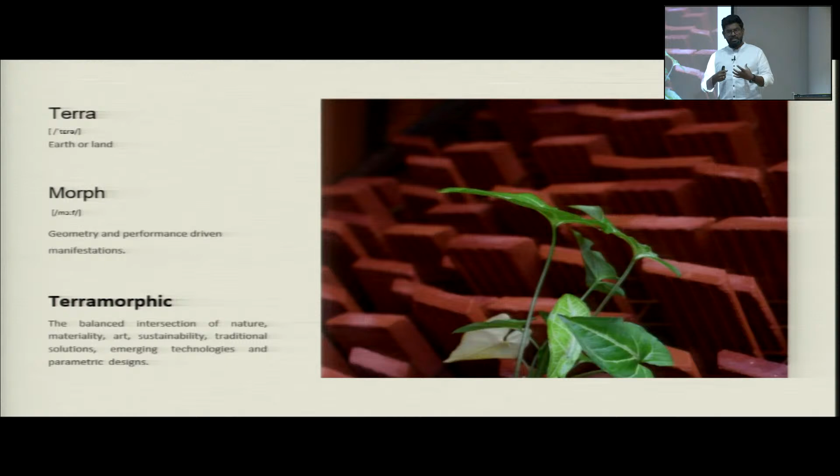So like I said, terramorphic - how we can try to balance, because this medium, ever since I learned from my gurus how to deal with it, when I started off with the practice, it was more about looking at the beauty more than the functionality of the material. I think as a material, it really allows us to play with form - it is so flexible and malleable, we can actually create almost anything.

There is one installation - the ultimate form was not in terracotta, it was done in fiberglass. But I think the first experience of how we played with clay, it's almost like a 10-meter long sculpture, 10 meter by 3 meter by 3 meter is the volume of that sculpture, wherein the entire formwork for the first time we made in clay. I think that's how I actually got introduced to the material.

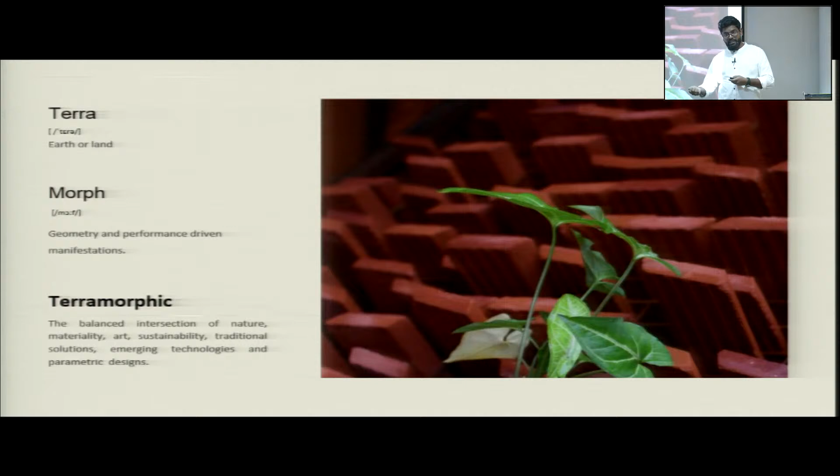So going forward today, I'll be talking about 3 parts. One, material and form explorations, which is purely form oriented, so I will not talk much about it - I'll just skim through some of the expressions and leave it at that, not getting into detail because of time constraints. I'll talk more about the CoolAnt, a product we're working on, and nature-inspired passive cooling solutions and how terracotta is playing a role in that. The last part I'll be talking about is the bioreceptivity of the material, and how it can actually play a role in air purification.

This is a research project that we're working on, which I'll also touch upon very briefly.

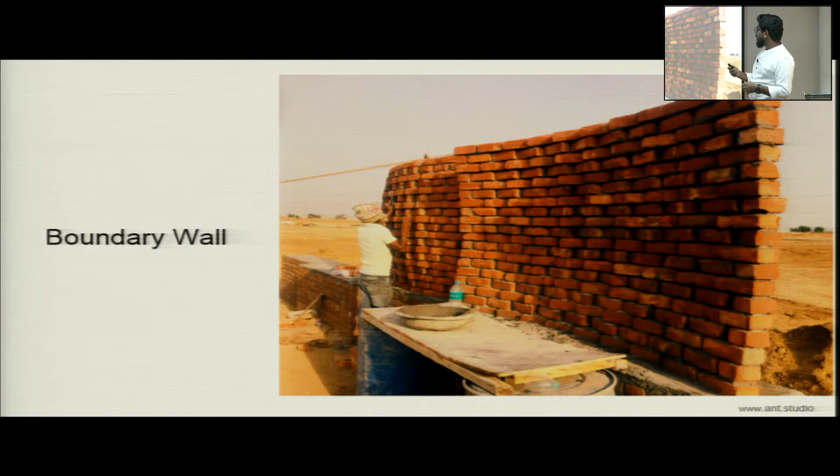In the initial stages, it was more about learning new parametric tools and seeing how brick can be adjusted into different forms, like a doubly curved wall. As an architect, my entire objective when I started playing with these tools was how we can deconstruct the brick itself, which we're so used to, like the standard brick bonds and all of that.

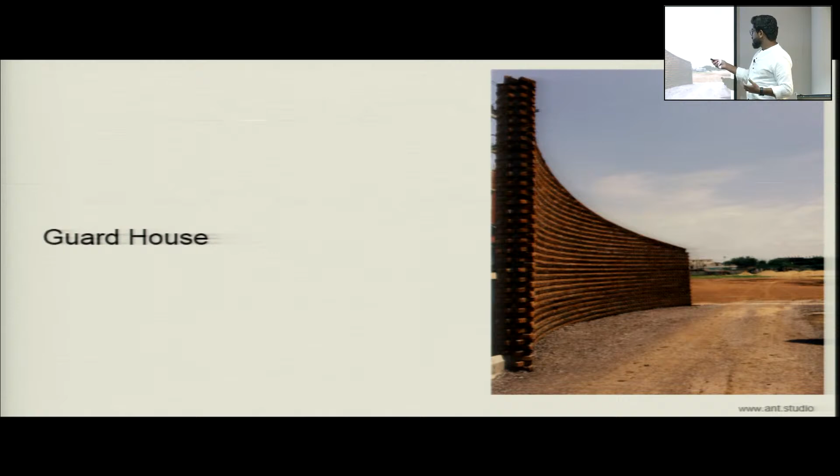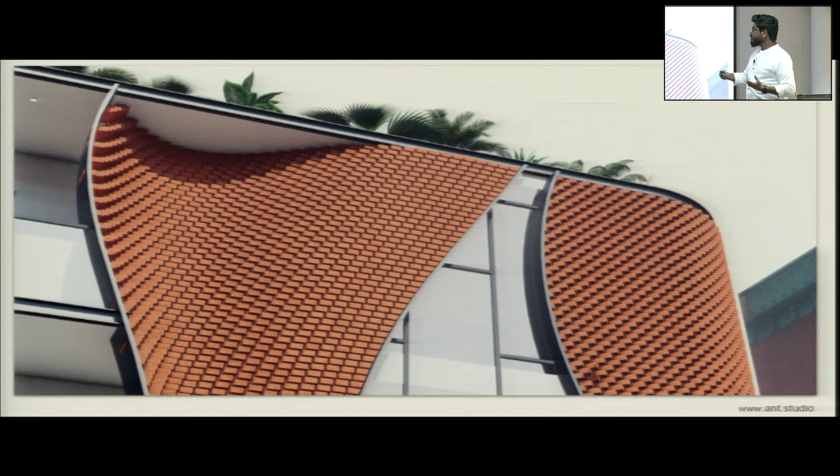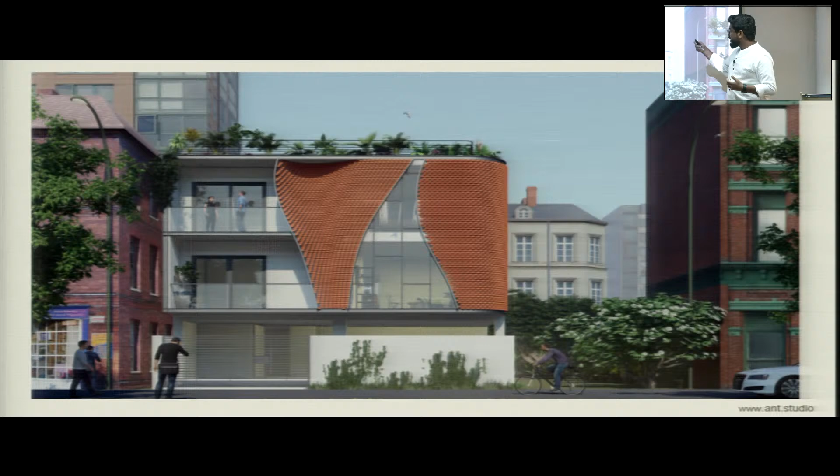How can we bring in a little bit of technology? This was 12 years ago, and we tried playing with expression in exposed brick. A lot of work in our practice revolves around exposed brick work, staying true to the material, using less plaster and cement, and trying to see how brick can take on new parametric forms while using a natural material, not anything synthetic or metal which has high embodied energy. Trying to see if we can use the same material for these expressive, parametric forms, but using terracotta and brick.

This is another project wherein the whole idea was to use a doubly curved wall to make a space for a factory that works 24/7, and they wanted something really warm and robust. It was done 8 years ago, and even if you walk in now, the space feels exactly the same. I think that's the beauty of the material, is that it ages really well, and because it's exposed, even the color and everything feels exactly the same after such a long time.

There's also the amount of emissions from paint or other materials to consider. I think that's what I really like about this material, is that it stays true to the feel even after years and years of usage.

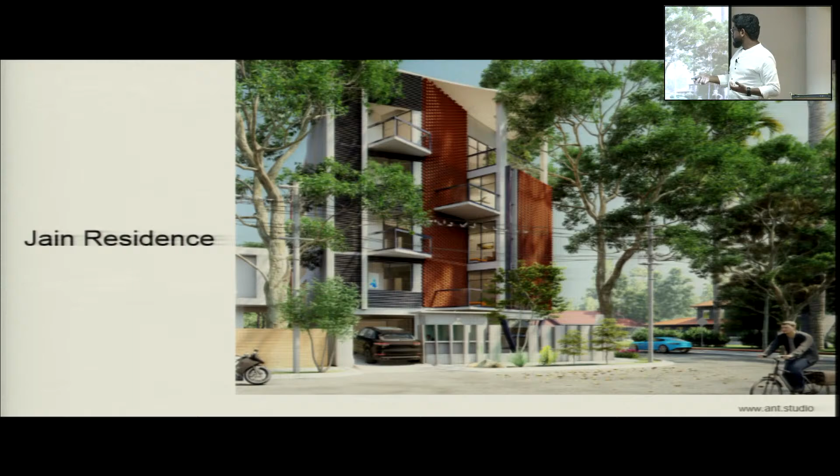So the whole objective is how we can take this forward. Exposed brick isn't new, it's been used for ages. What's new is how we can use this material for new forms.

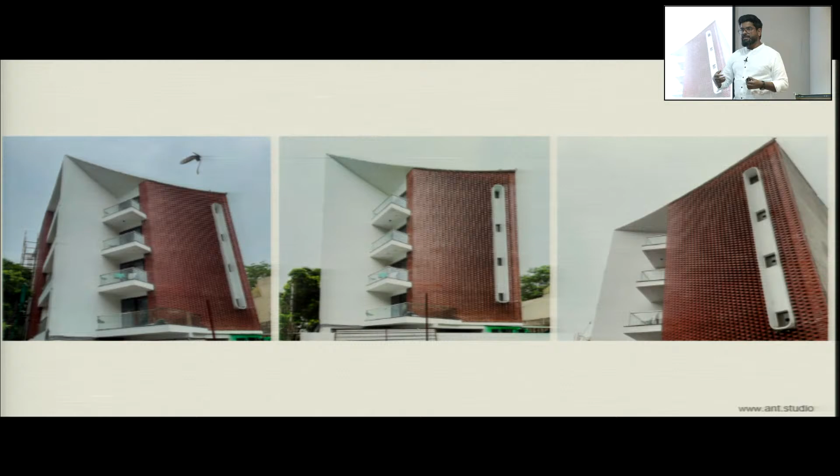These are images of the completed building - these are renders, and these are the real images. You can see there's a gradual wave-like pattern we're playing with in the brick bond, showing how we can bring new computational design tools into the design and create something more expressive than a typical exposed brick wall.

So far it's all about form and playing with materials. Now going forward - this is the roof. I've spoken about exposed brick so far.

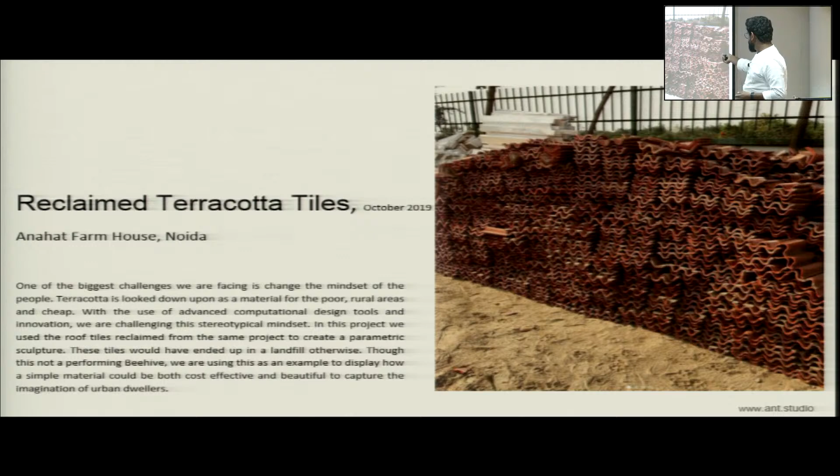This is a building in Noida where we recovered roof tiles that were dismantled - these are Mangalore tiles. The whole idea is that even the way they were stacked is beautiful, because these Mangalore tiles have a beautiful interlocking system. I thought, what if we use that same principle of interlocking and convert this into an art sculpture, testing how much cantilever we can achieve, and what kind of forms we can evolve with recycled tiles that would otherwise have gone into a landfill.

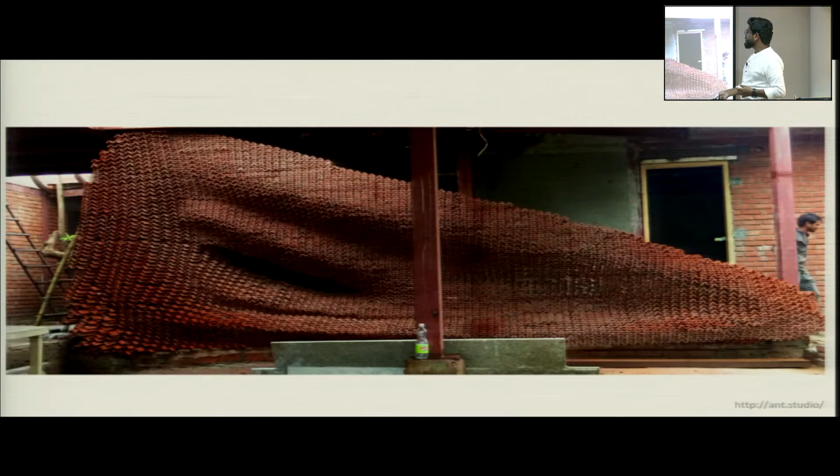These are some other images from when the project was under construction, showing how this interlocking happens as we experimented with the material.

The last part of the artwork I'll show is what we call the Pangolin Pavilion. I did this at the School of Planning and Architecture, SPA, where I studied recently, talking about computational tools and how we can use them for teaching while using natural materials for execution. The whole idea is pangolins - not just the form, but also how we can take inspiration from pangolins.

This was just before COVID. There was an article that we came across which said that in Gurgaon, they found an Indian pangolin, and they thought it was something really creepy and vicious. So they killed it. There's an article around it. And for me, and it's a perception, they thought it was scary.

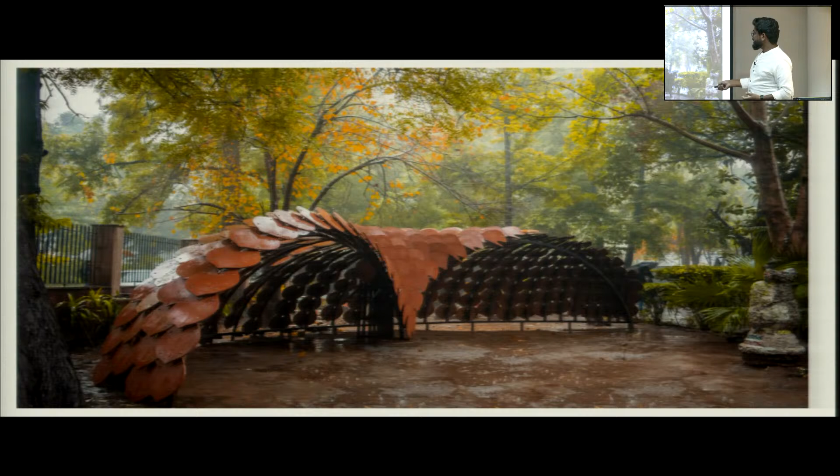For me, I found it really beautiful, and the entire form that is there is very biomimetic, and the beauty of it is extreme. I thought that is because of a lack of awareness that this is just another animal. They have not seen it. So we said, okay, why not actually create something inspired by the pangolin, so that we can also talk about these kinds of animals, in form and so on.

So this is like CNC cut terracotta tiles assembled together, trying to show that what we're trying to do here is the same material can be done using state-of-the-art technologies for some modern forms.

So like I said, so far it's all about form, and more about how we express beauty or a narrative to the material. Going forward, the second part of the presentation, I'll be talking about how we are trying to readapt and remember the traditional techniques that are there in the past, and rethink how we can actually use it and readapt in modern construction. So this is what we're doing.

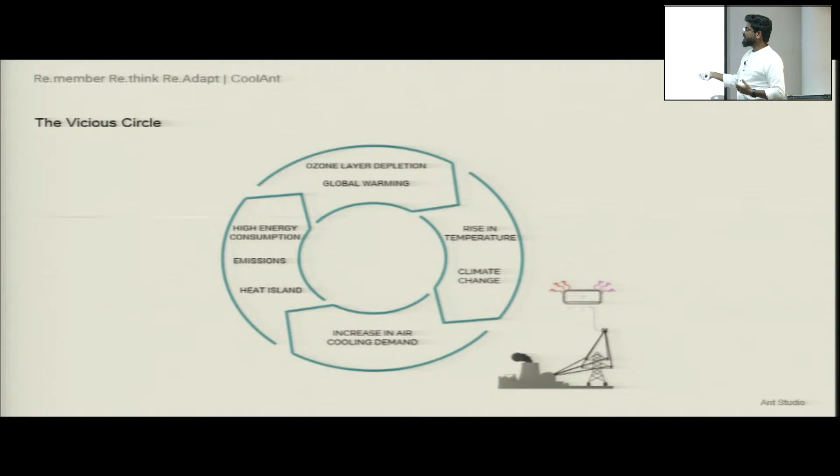So here, the whole idea is that currently the air conditioning industry consumes a lot of energy. I think this is something we keep hearing almost every day now, the harmful impacts of air conditioning and the vicious circle of how trying to cool our spaces is actually creating global warming and impacting the external environment and so on.

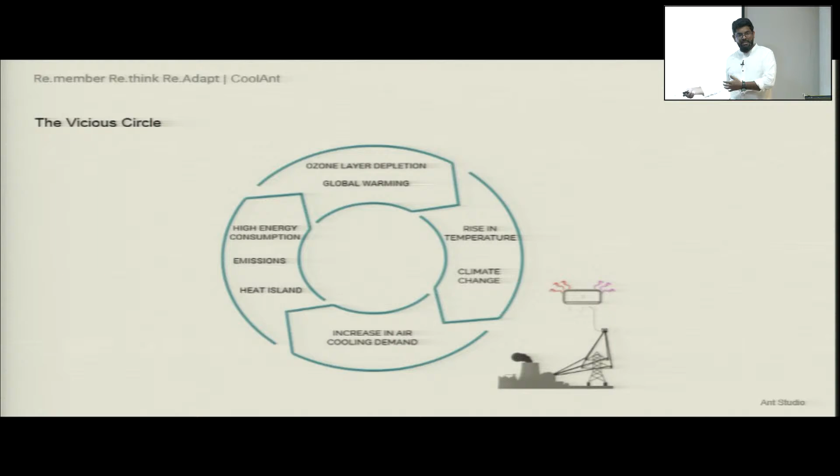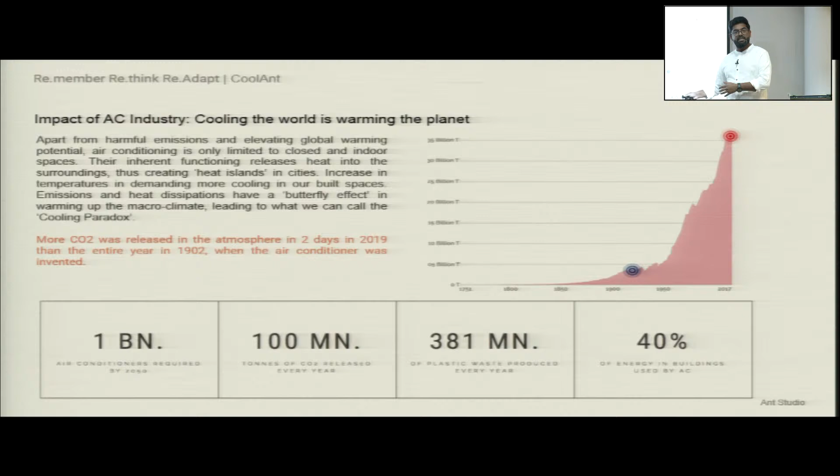There are a lot of numbers on this, but I think here we keep talking about how 40% of the energy in the building construction industry is contributed because of air conditioning. Especially in India also, every year we keep saying there's a 15% rise in the number of people. As a growing economy, more and more people are able to get access to air conditioning.

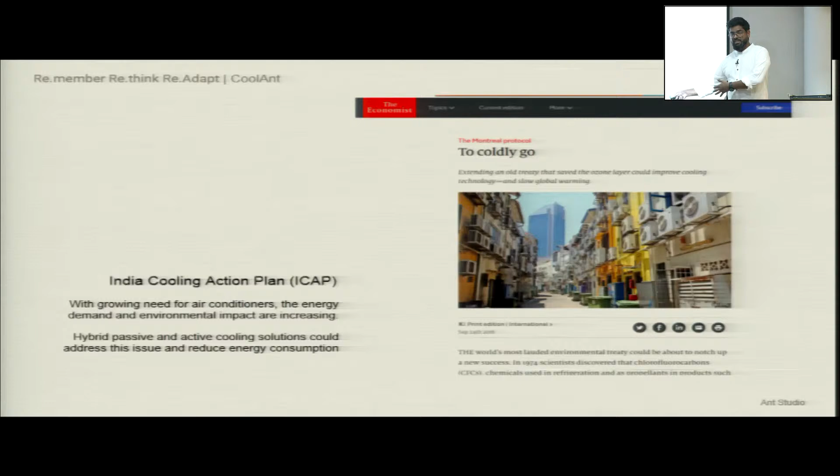So what are we doing about it? India came up with a cooling action plan, emphasizing the use of hybrid active and passive cooling solutions and so on.

But this is the question. What I really wanted to think about is, how many buildings are actually designed by architects? A report states that it's actually less than 2%. And I still think that 2% is a very bloated number. And in that 2%, how many buildings are actually environmentally friendly?

How many people are actually keeping their emphasis on trying to make buildings sustainable? That I think is a fraction of even further than 2%, which is the total impact of designed buildings by architects.

So the whole idea is, what if we start looking at buildings not as a service? I think the biggest drawback in our industry is that it's a service industry. We talk about scalability, unlike mobile phones and cars and other automobiles, where you get access and in a day you get the products from the market. But that's not the case with buildings.

That's not the case with how we look at our buildings. It's a service industry. It's a pain, a labor one has to go through to get from a design from an architect till the execution. So that's what makes it not really accessible by the masses, by millions of people all over the world. I think that's the biggest drawback in the industry.

So the whole idea is, can buildings, or at least a component of that, be designed like products? Like the whole facade which people can actually pick from the market, so that the entire thinking process of people can be reduced, and we start looking at how it can be pick and place. So all the thinking is done back end, and you can convert a part of this industry into a product industry. That's where we are looking at how cooling, especially the building envelopes, can be productized. That's where I'm coming from.

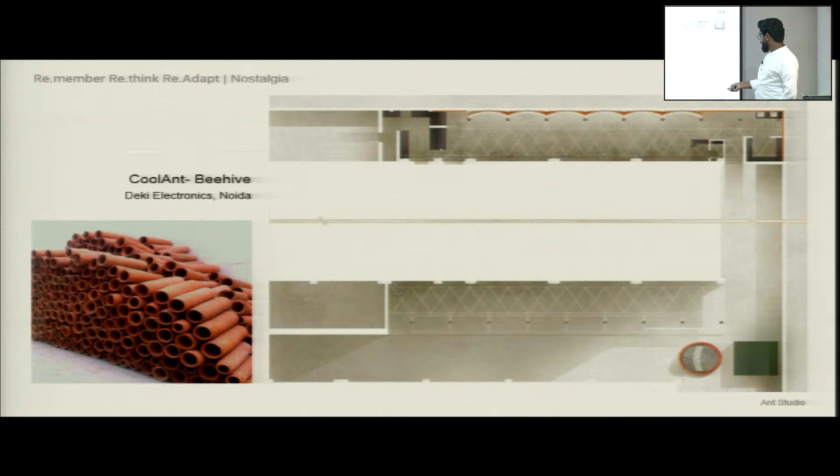So this is an installation we have done. This is the first installation, in 2015, I've done for a factory using earthen pots, wherein we were asked to create an art installation in front of a DG set. Like I said, we do a lot of artwork to cut down the heat coming from this DG set.

So what we proposed, this is the first prototype, the proof of concept, made using a simple brick jali with running water on top. We realized there is actually a substantial drop in the temperature. We took that and converted it into a beehive, which I'll show later. So this was a proof of concept.

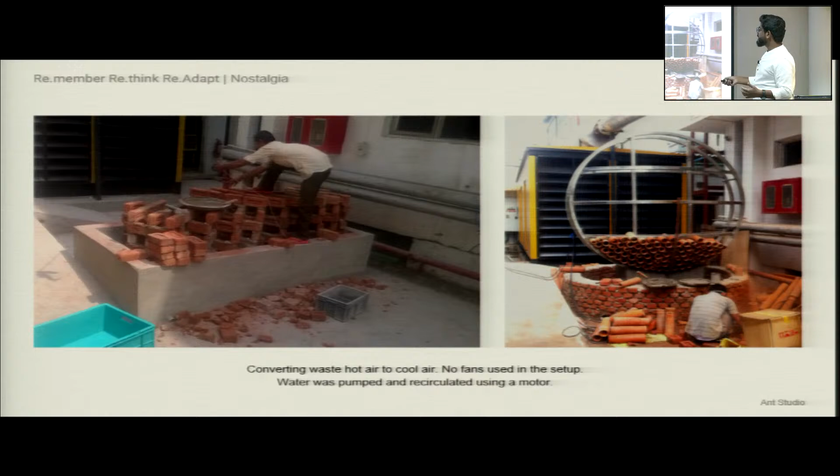So we thought, after doing this, why not use technological tools like CFD analysis to measure the performance of the material, combining technology with what is otherwise a traditional craft. We know traditionally that if you put water in an earthen pot, it remains naturally cool due to the latent heat transfer.

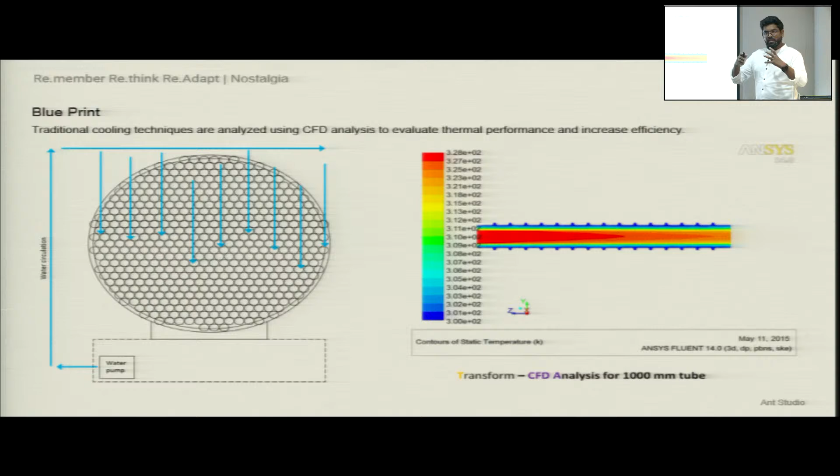So the idea in this case is, can we use the same technique, but instead of trying to cool water, can we reverse the process and try to cool the air? So instead of an earthen pot filled with water, can we make a series of cones stacked one on top of another, so that as the air passes through and comes out, it's naturally cool?

The form is inspired by the beehive, so we can increase the surface area on the outer and inner edges, and the water gets retained in the pores of the material, because terracotta is porous and also hydrophilic in nature. It absorbs water. Even in monsoons, even without pouring water, it naturally remains cooler. So can we use the property of the material itself to create an art installation that is both functional and artistic at the same time?

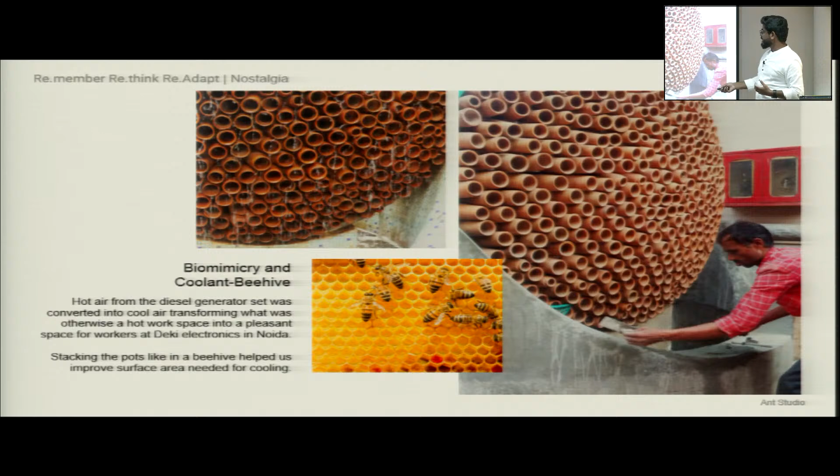So this is how we started, and then we started seeing how we can take it to different places in different forms, introduce a metal grid in between so that it's faster and easier to assemble, really quick, and in multiple places.

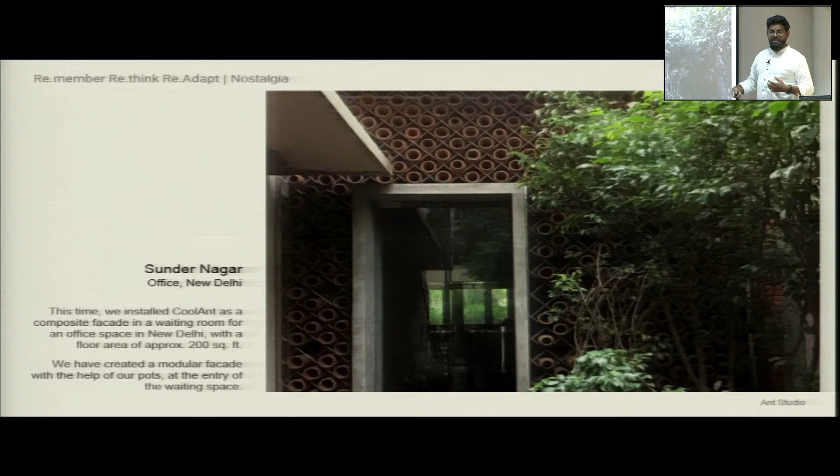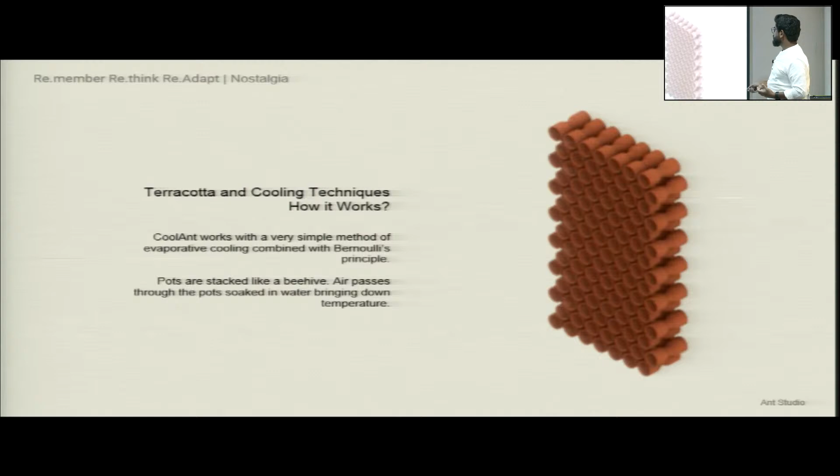So we started looking at how this can be scaled up. The whole idea, like I said earlier, is how can we scale it and productize this, rather than making it a service industry with a unique art piece for every installation. Is there a possibility to scale it? It's a very simple system where we stack pots on top, run water, and it keeps the air naturally cool.

But what we are really interested in is how we can use technology to... it's a GIF, it's not playing.

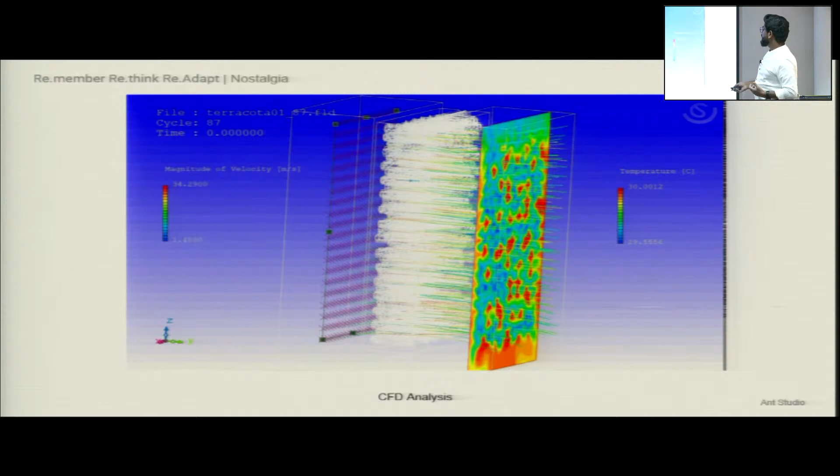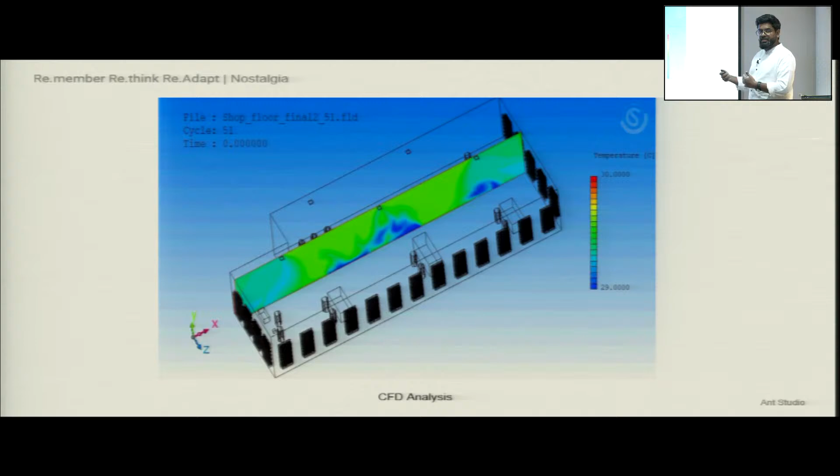So how can we use this analysis to measure the performance of the material, and then scale it into spaces to understand how we can even work on increasing the performance of this. So that's the whole idea.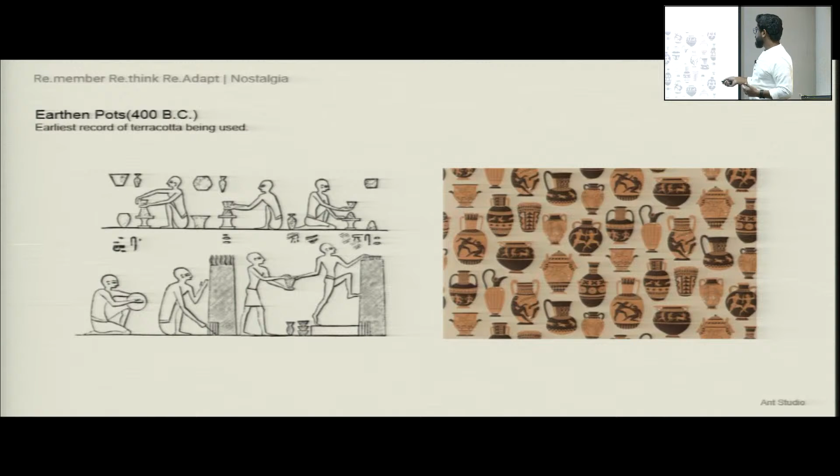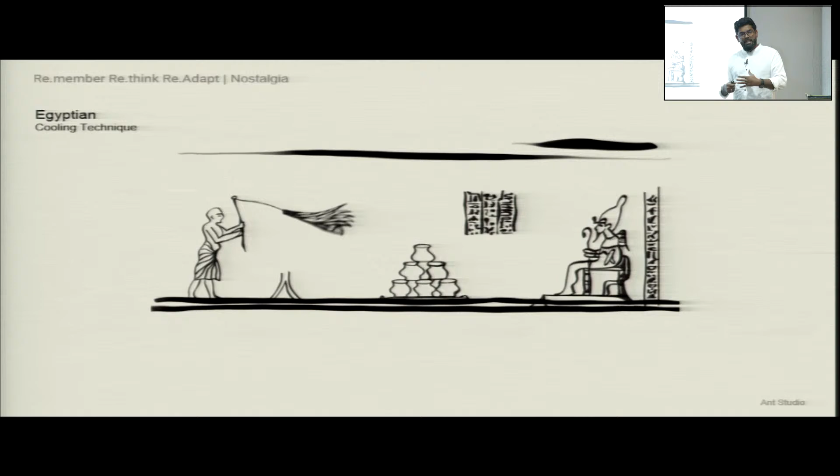I just spoke about how these pots are actually used for water, which we can use for cooling air. So after a series of experimentations, we tried to see if we can scale it up or condense it or streamline it, so that rather than being intricate art installations for buildings, they can actually become building facades that can be used for any building.

So this is a beautiful example which we came across. These are a series of pots filled with water. This is actually Egyptian, the pharaohs used to make the slaves fan the surface of these pots for cooling. And similarly, we know there are thousands of examples where building envelopes in hot climates like Jaisalmer in Rajasthan, or Gujarat, and many other places, were designed to keep thermal comfort inside.

It's very obvious that if you look at a facade or the building envelopes, these are intricate jalis that are there. And the same thing if you go to Ladakh, where you have big windows but thick walls to retain the heat inside. So all the buildings are always designed to make sure that the thermal comfort inside remains cool.

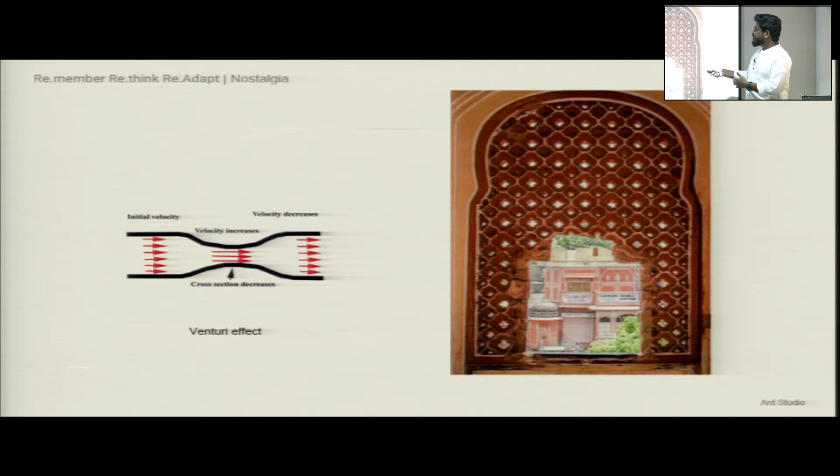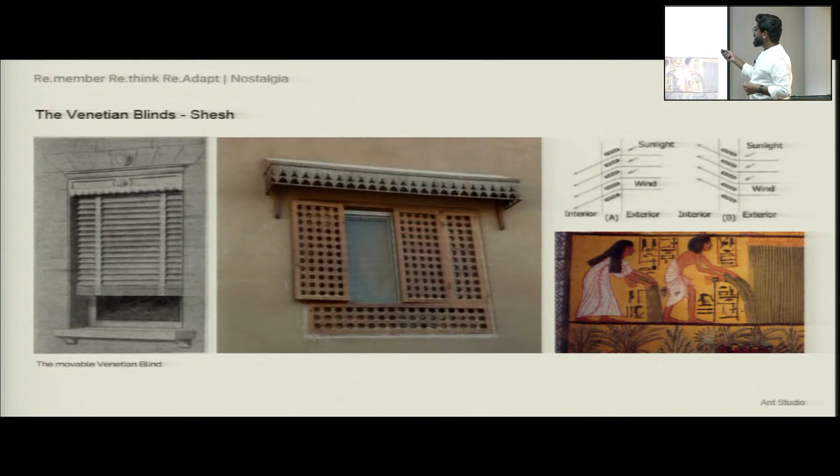But that's not the case as we keep moving, which I'll just check. And these are some beautiful examples, the Venetian blinds. This is a technique where reeds from the river were taken, the roots, and then dried to create this kind of Venetian blind, called the Shesh. So traditional systems were there, how the roots were used and then later converted into these jalis and blinds, how they evolved. It's a beautiful story.

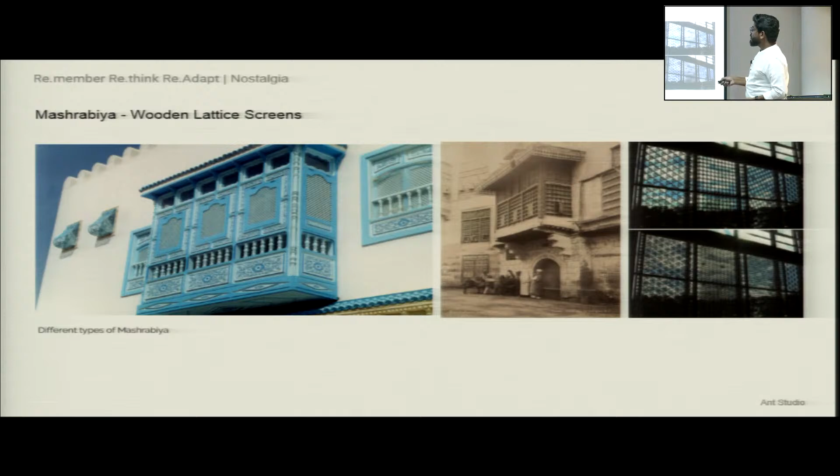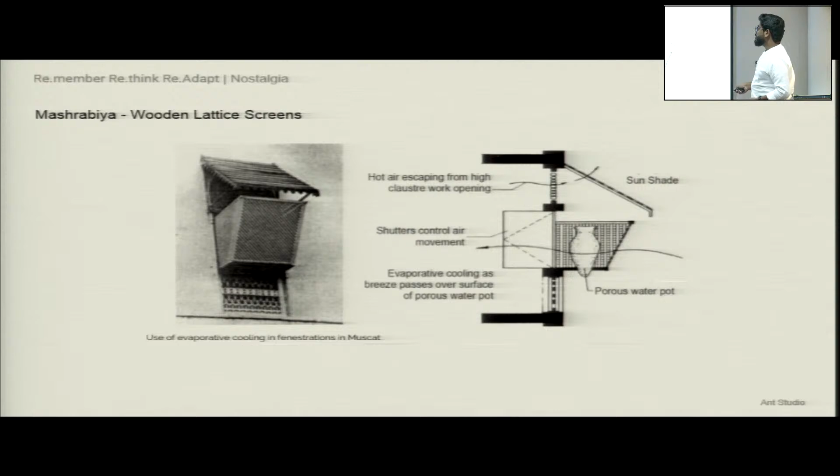And then we see these mashrabiyas in the Middle East, like our jarokas in Jaisalmer, where these are intricate wooden windows where people used to sit. It is both for privacy for women when they're looking out, for them to sit and look at the streets, and at the same time it was designed so that they used to put earthen pots in the windows, so that when the air passes through there is cool air circulation happening from outside. It becomes a place for both social interaction and cooling functionality at the same time.

I think somewhere we forgot about the reason behind these forms and how building facades were actually tailored for functionality. We end up just looking at the beauty and celebrating it rather than understanding how the systems actually work. Currently the problem is we believe any building can be designed and then you put an air conditioner like a magic device and it's cooling the problems, without really worrying about the simple concepts of natural ventilation, passive cooling, air circulation, and then evaporative cooling can follow.

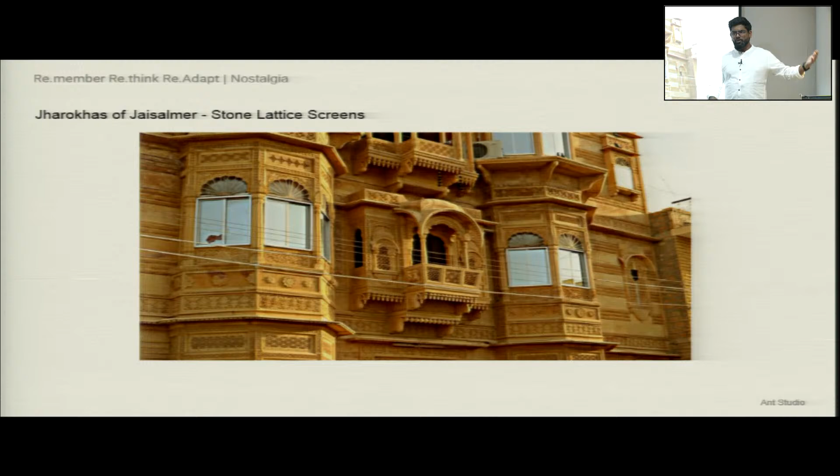So this is exactly, you take this, this can be any city. One cannot say that this can be any particular city in the world. That's what we call the paradigm shift. We talk about technology and all of that.

So is there any room, when we talk about technology, for culture and these practices that we are doing? Can we still talk about building facades that respond to a particular city or location and the climate? I think that is a missing link, because India is diverse, in geography, climate, and even how we wear our fabrics or fashion. It's very different from one place to another, and that's how even the buildings were designed.

If you go even now, we look at all the touristic places, we keep running to Kerala for beautiful houses, or Tamil Nadu, or Rajasthan, and that's because of the climate. People talk about how clothing varies according to climate, but that's not the case with how it's happening with buildings.

So the whole idea when we speak about buildings is: can the facades actually breathe? What if building facades are designed like a second skin, like the fabric we wear, reflecting the climate and the culture? Bringing the whole conversation back to how building envelopes as a product can actually tackle that.

So drawing simple inspiration from natural processes, when you talk about biomimicry and trying to imitate nature, the easiest thing we do is copying the form and the shape. There's nothing wrong about it, but that's the easiest thing to do. The other one is copying a certain process. And the third, which is the most difficult part, is mimicking an ecosystem. How can we mimic that?

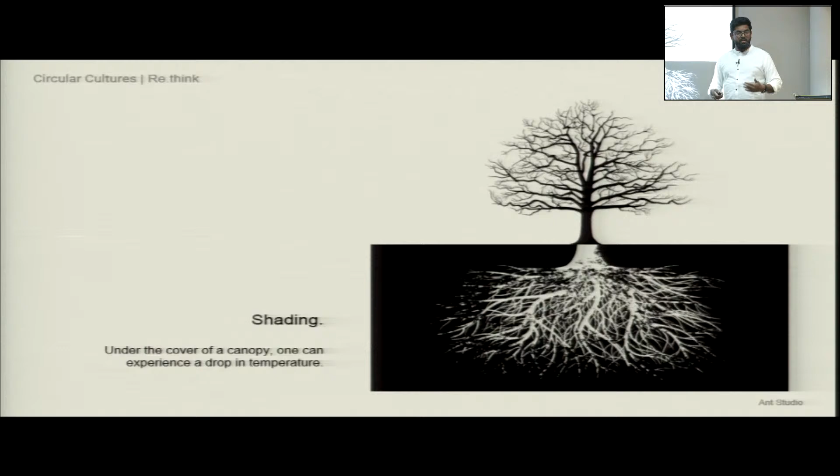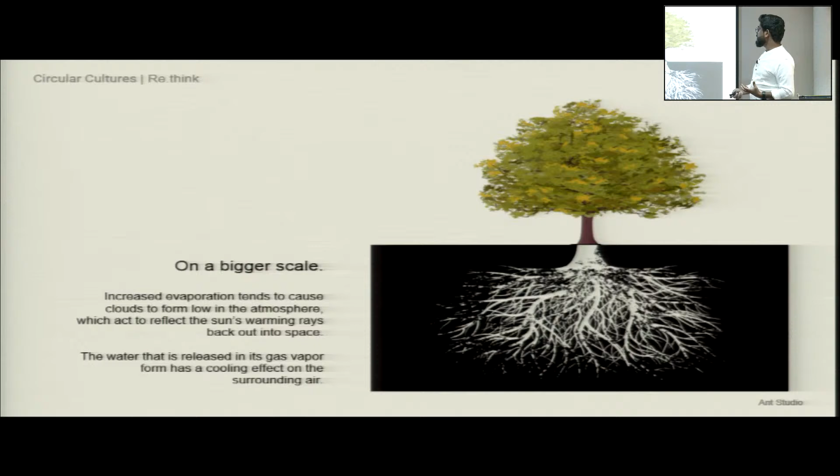I think in this particular case, what we're talking about is trying to see how we can mimic nature. For me personally, tree is the best example of beautiful shading, because whenever it's even hot, on a 44, 48 degree summer day, you just walk under a tree and you see this beautiful, drastic drop in temperature right away. That's majorly because of evapotranspiration that happens through the roots and leaves, which acts like both insulation and evaporative cooling, and at a larger scale contributes to the balance in the ecosystem, the seasons, and carbon sequestering.

So what if we have buildings just like the foliage of a tree? What if building envelopes, instead of being glass buildings, can start looking and behaving the same way the foliage of a tree does? So we are trying to see if we can mimic the leaf.

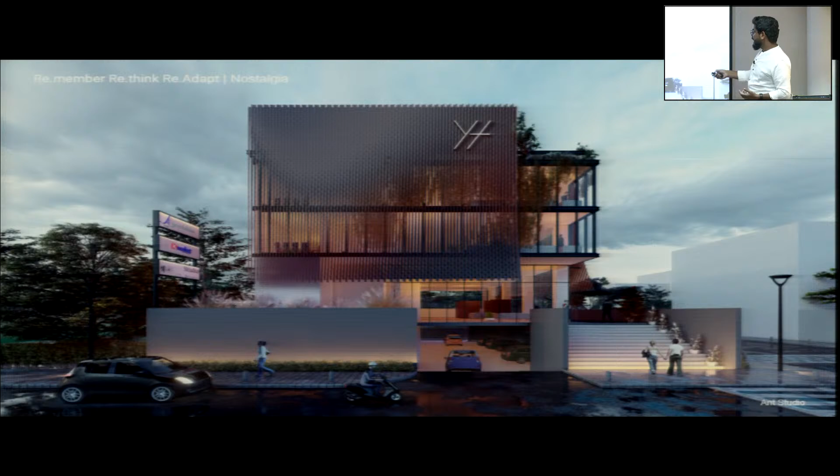The evapotranspiration on a leaf, how the evaporation happens - what if these terracotta modules, like the installation right outside, store water within them? Each of these terracotta fins can behave like a tree, with evapotranspiration happening on all of them. This system can act like insulation on the building skin, and it works in 4 different layers.

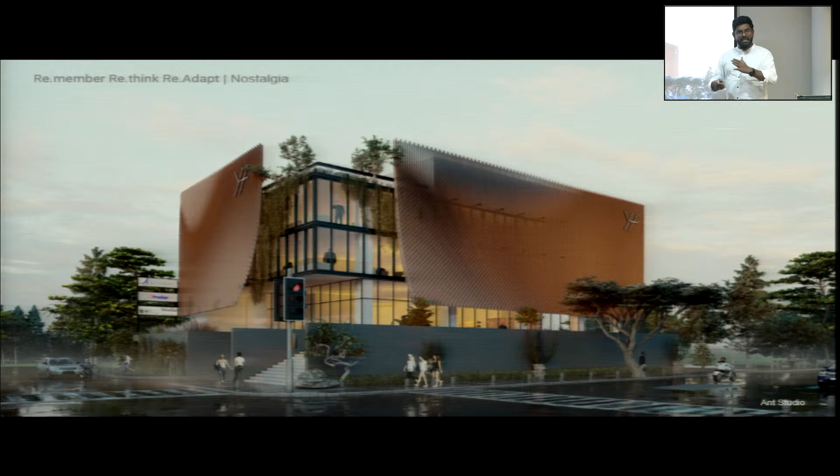One layer acts like a screen that cuts the heat entering the building, and they can be oriented at different angles so you can cut it off according to different cities and the orientation of the building. You can adjust and play with the angles, and also play with the porosity of the material.

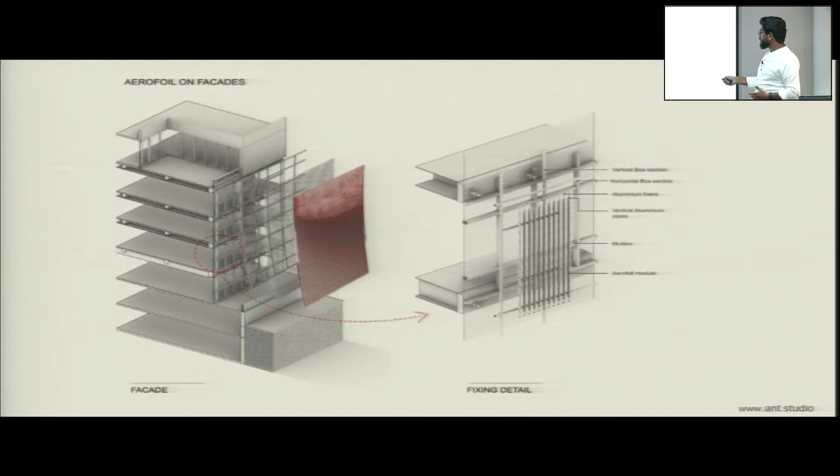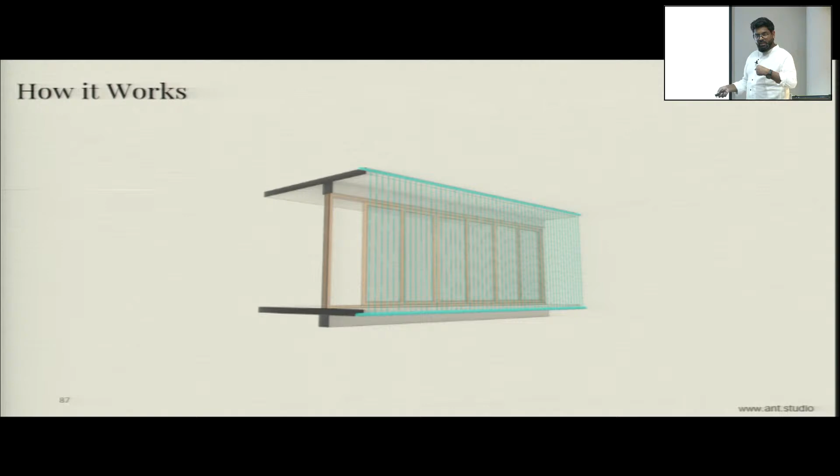So these are some of the works we are doing right now to see how we can mimic the foliage of the tree, converting these aerofoils which we kept outside. Water runs through this setup so it retains the water, and the water dissipates from the surface as air passes through. It's a very simple system, nothing very complex, but it has flexibility - one can adjust the angles, and it can be kinetic.

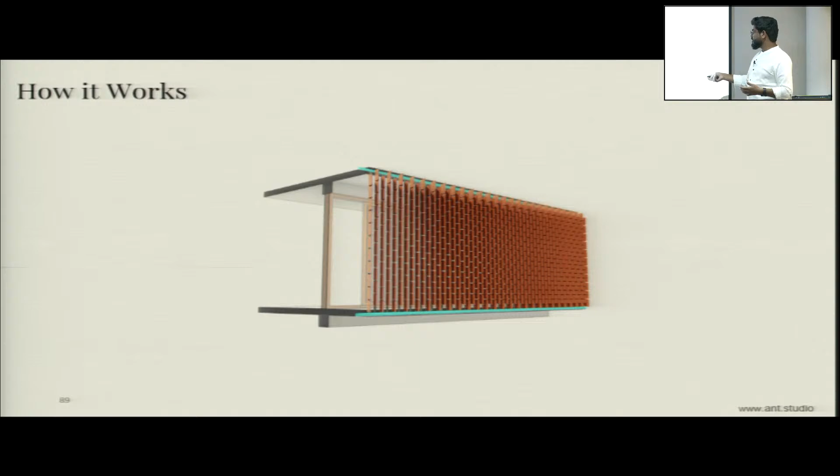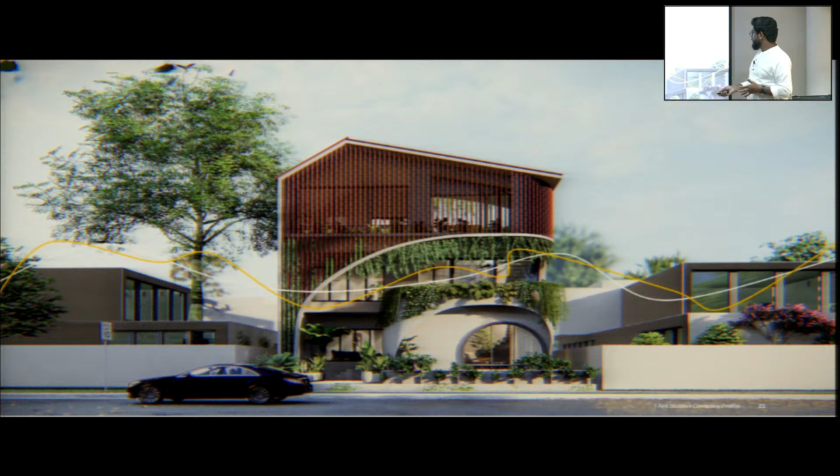We are doing one project for a client which is kinetic, but it can be fixed according to the orientation so it's cutting the heat inside the building. These are some other examples of how we are working on these angles and playing with them for different projects.

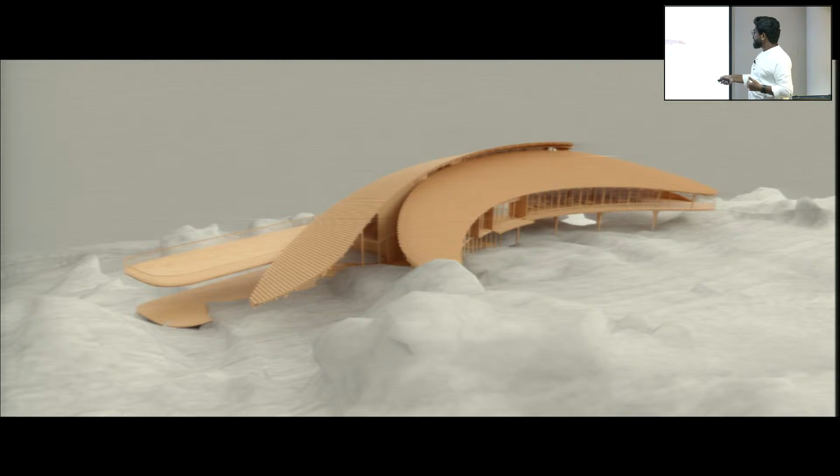This is another project where we are working on the southern facade. We have the screen, which acts both as a privacy screen and as a facade that cuts off the heat with the terracotta. The roof on top is also terracotta traditional jali, but designed as a modern interpretation of a sloping roof, what we've always seen in traditional buildings, readapted to modern forms.

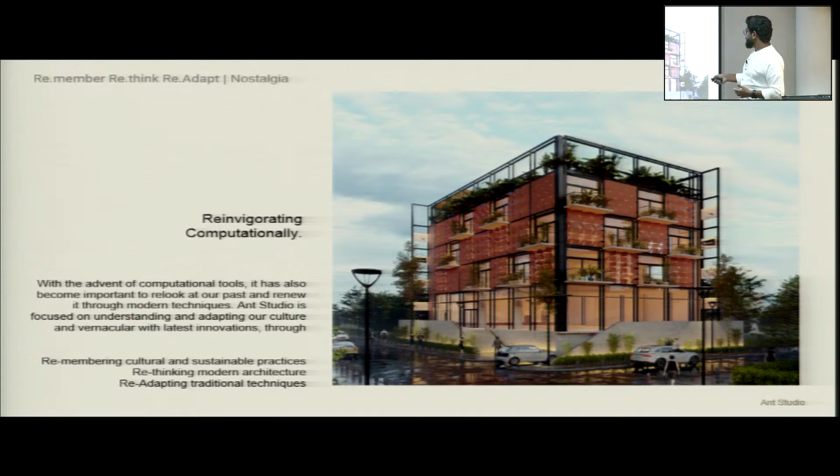In another installation, these leaflets can actually regulate the heat depending on the day - at different parts of the day we can open and close these to regulate the heat and light coming inside the building.

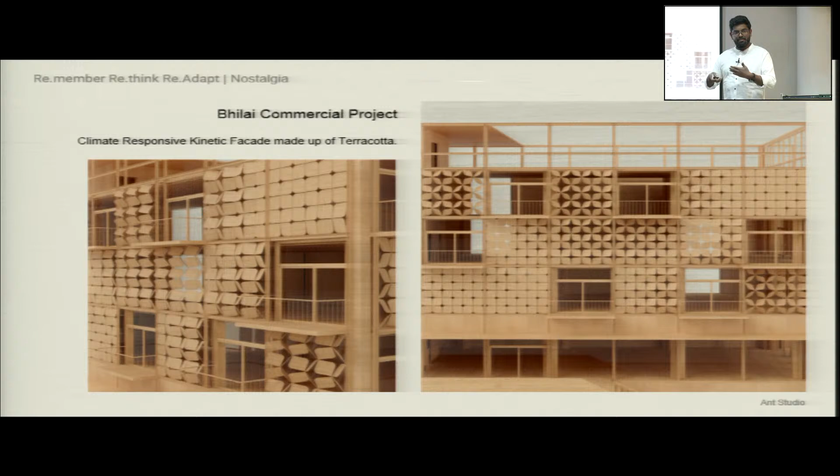So I'm talking too much. Any questions? This is the last one, I promise. I think I'll finish in the next 3-4 minutes. Any questions? But in the meantime, I have lots of questions, but maybe you should finish.

Yeah, I think I'll just skim through this. This is something we have actually seen - this beautiful moss and everything that grows on the surface of the pots. We have to do nothing, just let it be. With rain and the weather and all, we actually get this beautiful moss growing on the surface of the pots. So for the first few years, we thought it was a problem.

So we used to add chlorine to the water and everything, just to kill it. That's what we did for the first installations. Some people still don't like it, so we say, okay, if you want to kill it, it's really easy, you just have to put some salt and chlorine, it'll take care of it.

But then what we realized is it's actually a good thing if we can amplify this process by growing moss, because terracotta is beautifully biophilic, it's both hydrophilic and biophilic. I think that's where the magic happens, the moss grows, and you can actually amplify the growth on the system and the material. That's where these things start to come to life. I found it really beautiful, this thing that can actually grow on top.

So we started looking at how the system we're talking about can be both a cooling facade and also try to accentuate the air quality by growing creepers and plants, trying to make it almost like a zero plastic, vertical garden on a building facade, but one that can both generate cooling and support the plants and so on.

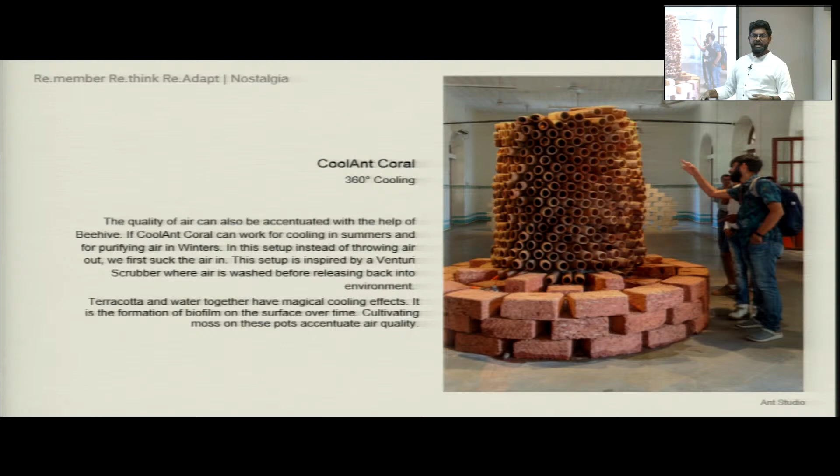So this is another installation, what we call a coral. This was designed for the same cooling as the beehive, but 360 degrees. We started seeing if this could become an outdoor system for air purification, if we could amplify the growth even further on these ceramic pieces, stacked radially, drawing in all the hot air and cleaning it, like an air washer.

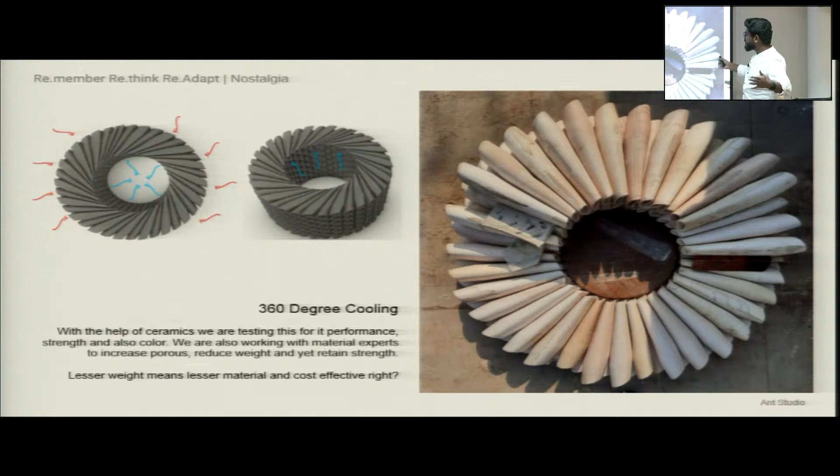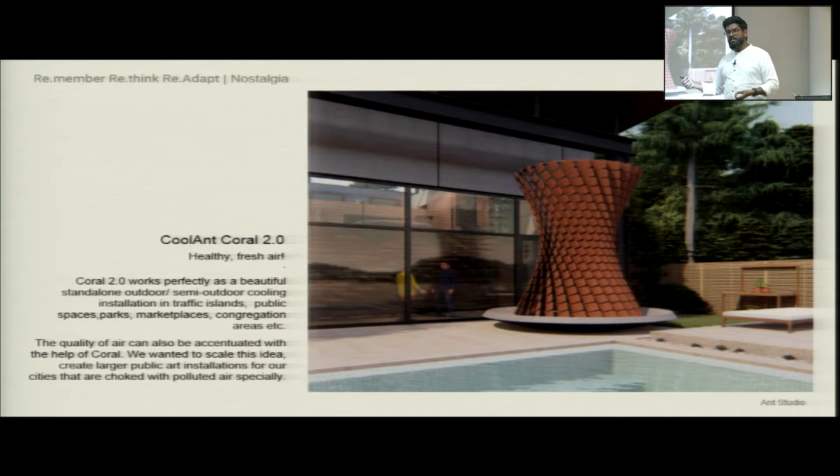This is a work in progress, a tower we're working on using the same terracotta. You wash the air coming in, purify it of heavy particles, amplifying the growth of moss on top. This can work in public spaces both as an installation and a functional system. It can't handle the minutest particles, but it can cleanse heavy particles in the air and create a fresh local microclimate around it.

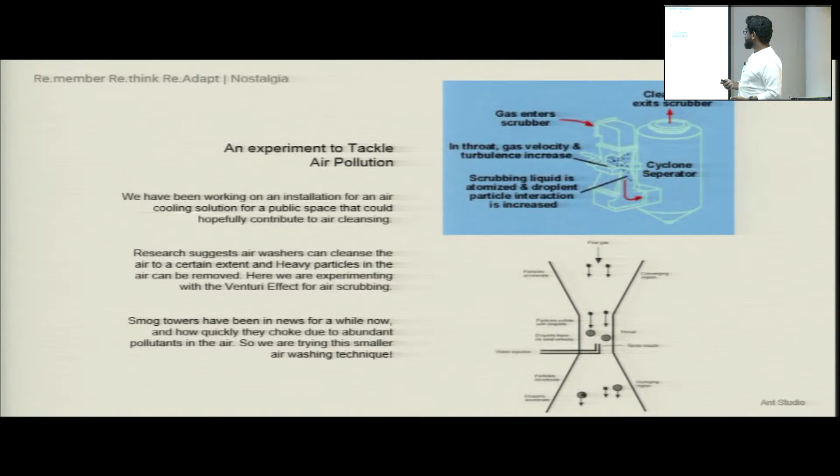So yeah, I'll just skip through this. Thank you.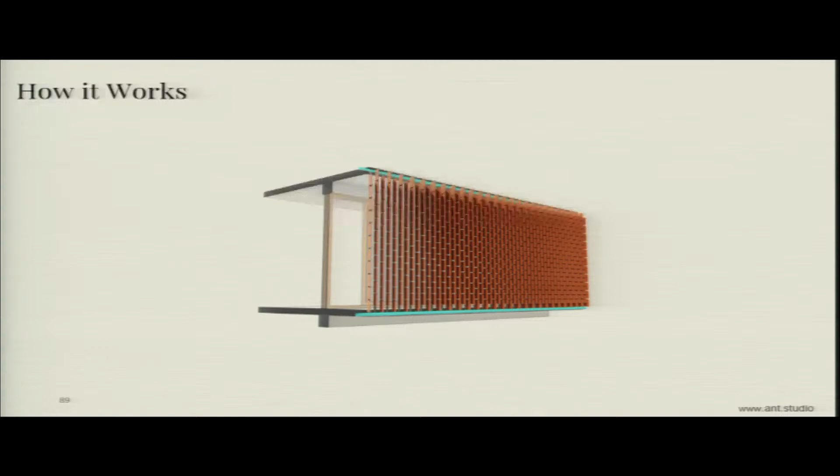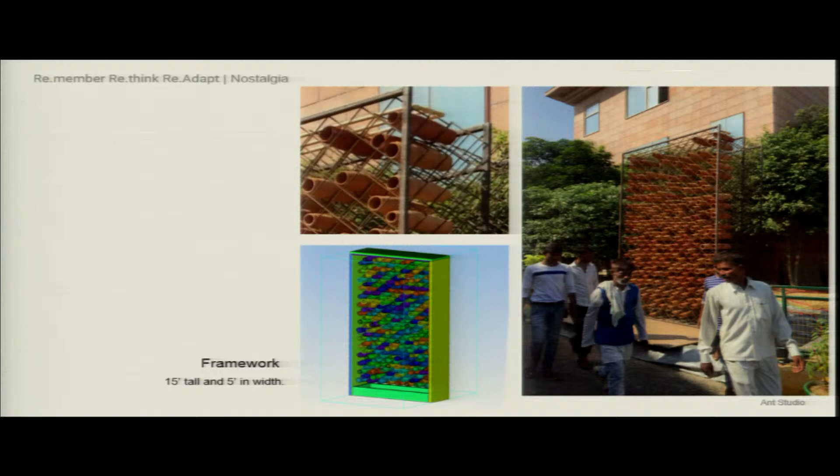Sure, answering your first question about the clay, where it is available and all of it. If you look at the initial part of the presentation where I was talking about the earthen pots, this was done using hand potters. These are all earthen, can be made with potters on a grid. We are working with potters from Uttam Nagar, Khurja, Bhuj, Pune, a lot of different places where potters can actually make these.

If everybody starts making it, then there won't be enough clay, she asked. No, ma'am, the whole point is that clay is a material we already use for bricks. It's just the shape that's changing from bricks. The material we typically get is already there.

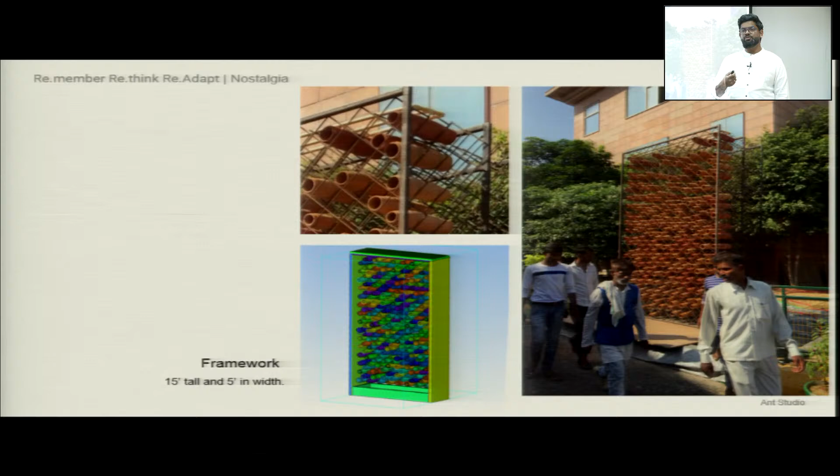We are talking about the same material, but in a different form. So with clay, the functionality isn't the difficulty. The problem is not clay itself, because there is abundant clay, but specifically topsoil, which is actually fertile and which we use for agriculture. What we are getting is not necessarily topsoil.

The strength of the material also differs based on the clay itself, so we tried a lot of experiments. For instance, this is handmade, and these are baked at a temperature of 700 degrees. The life of this, I think after 3 to 4 years, would deteriorate, chipping off in some places, edges and all.

There are two ways of looking at it. One is that the life of it is really short. The other way is that it actually disintegrates and goes back to nature, which I find beautiful. Some people don't agree; they want a really high ROI, return on investment.

In this particular case, when we're talking about environment especially, the biggest problem is that we design for eternity. When you talk about materials in a product, we want them to last forever. I think that's where the real problem comes into play.

In this particular case, we are saying let it be this way, it's really cheap. These potters, anybody can actually make it, it's not very expensive. It disintegrates and goes back to nature. The other way, like I said, is that you want something industrialized, to last at least if not 3 to 4 years, but 20, 25 years.

Clay we have seen archaeologically, and sitting especially in this building, we are talking about conservation, and we have seen clay buildings lasting decades and centuries if done properly. So that's where the next system comes into play, where we have industrialized it, baked at a higher temperature, 1100 degrees, what we call aerofoils, and they can easily last 25 to 30 years because of the method and process we follow for the clay, not handmade.

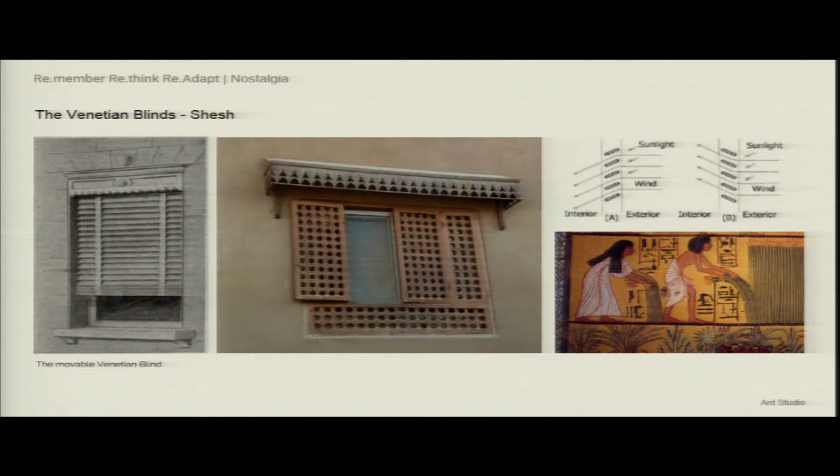Answering your last question about Delhi, at least now the cooling period is only 2 to 3 weeks. When I came here, I used to wear sweaters in October, but now even in November and December we were walking around in shirts. That's the problem, because we are talking about global warming and how seasons are changing.

So the whole idea with a flexible system like this is that it can easily be regulated. The whole point of this technology is that it can be adjusted according to sun angles, mathematically calculated, so you can let the sun in when you want and cut it off when you don't need it. That's the whole beauty of these flexible louvers, that they can adapt according to the weather, the climate, and the time of day.

So I think I've answered all your questions.

Well, maybe I can ask a quick question. What is it with Ant Studio, the name? Could you explain that? I think when I first started my practice, the whole idea is that even though we work a lot with these materials, I'm also inherently into technology, my motherboard is technology.

I actually wanted to see everything. I have done my PG diploma in robotic fabrication, and technology, programming and stuff. I love these two ends, natural materials but tech. So one day we were having this random conversation with my friends on the streets after college, when I was doing this robotic fabrication thing. I said, just imagine a future where you forget everything done in the past. Just you have technology and resources, and forget how people are making buildings. How would one do it? That's the debate we were having.